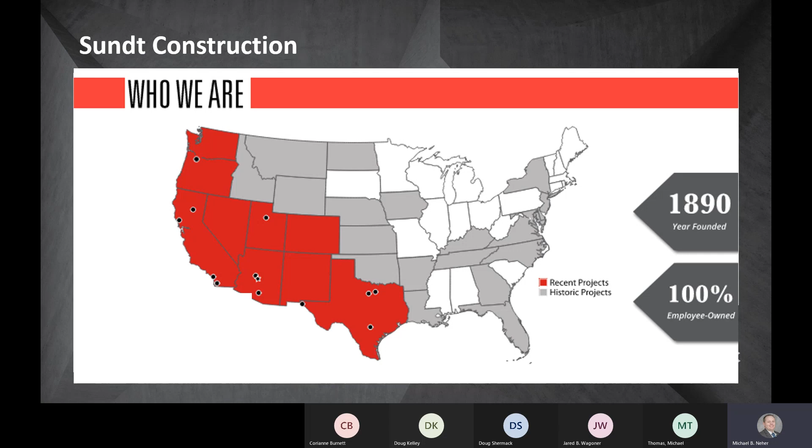So the agenda for today: every meeting we start off with a safety share, it's the most important thing we do every day, so we want to make sure we tackle that first before we move on to anything else. We'll do a quick project overview and discuss the project schedule. We'll go through bid schedule and bid opportunities as it relates to Division 32. We'll go over a brief description of instructions to bidders and exhibits, kind of what you would expect on bid day, as well as the bid form. Then we'll go through some deferred or delegated design responsibility that'll be the responsibility of the Division 32 contractor. Then we'll go into an in-depth review of Division 32 scope of work, and then open it up for questions and answers at the end.

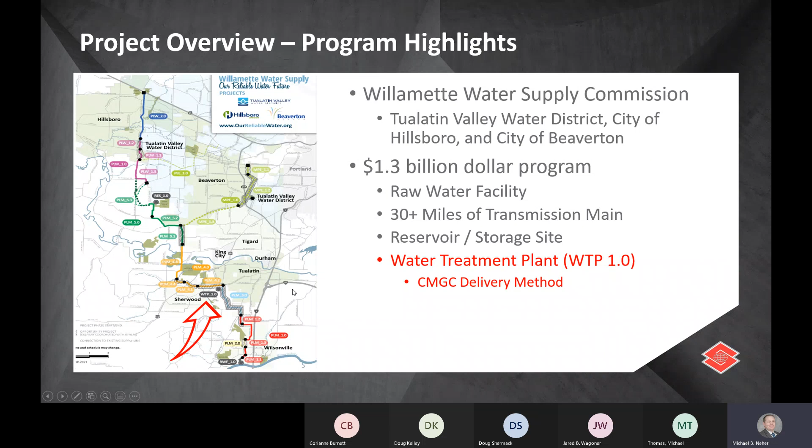So this right here is where the water treatment plant is. Zooming a little closer, the red box on the picture is the exact location of where the water treatment plant is going to be. It's located about half a mile south of the Tualatin Sherwood Road and 124th Street intersection. This site was specifically chosen because it is an outcrop of basalt bedrock, and the plant is designed to sit directly on this bedrock for seismic reasons.

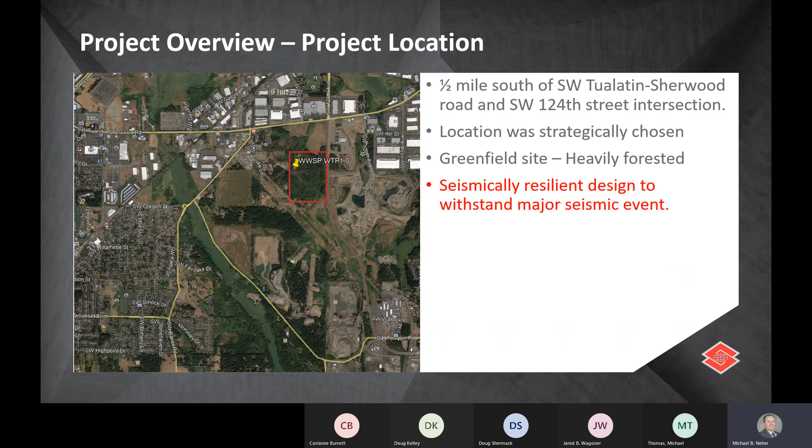That's really the major design decision of this plant and entire system, to be a resilient system and plant during a major seismic event. This site is currently a greenfield site, heavily forested, so one of the first things we'll have to do is deforest everything. We'll have a lot of drill and blast that has to happen to level out this bedrock outcropping and to be able to build the structures.

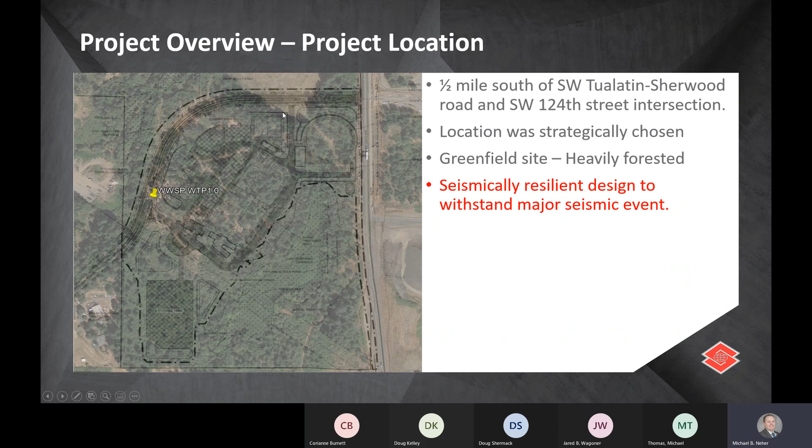Zooming in a little closer, you can kind of see the project overlaid with the existing foundation, or the existing forest here. As I mentioned earlier, it's right off of 124th Street, where the main entrance is going to be, onto a new road called Orr Drive, or Orr Road, sorry.

So the project itself is about 23 acres. There are multiple treatment areas on the site, including a 10,000 square foot administration building. It also has about 40,000 cubic yards of concrete, which includes both structural and site paving, curb and gutter, sidewalks, and stuff. The structural concrete is roughly 32 or 33,000 yards, so the remaining 7 or 8,000 yards is sidewalks, curb and gutter, and other site improvements.

Approximate earthwork quantities are 65,000 yards of cut and fill, 180,000 yards of structural excavation, and 120,000 yards of pipe excavation. There's also $20 to $24 million in process equipment that will be directly purchased by Sundt on this project, and the install will be done by the process equipment package.

There's a 10 million gallon pre-stressed concrete reservoir, which is this large circular structure shown on the picture, as well as there's multiple pre-engineered metal buildings throughout the campus. And there's multiple building trade opportunities that can be bid on.

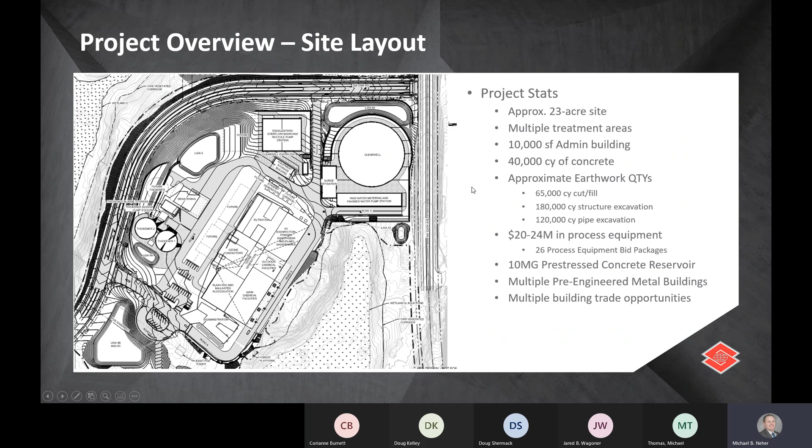Going to the project schedule, we're expecting to kick off in the first quarter of 2022. And like most wastewater type jobs, it does have a long burn. Right now we're expecting the site grading, paving, hardscape, miscellaneous site appurtenances, irrigation and landscaping will be occurring roughly first quarter to second quarter of 2024, and we need to be done with that by the end of 2024, beginning of 2025.

Bid schedule and bid opportunities. We have two GMPs on this job. A GMP is basically a bidding phase. The first bidding phase, GMP 1, officially starts next Friday when it advertises, with bids due on November 4th. GMP 2, which is the later work we're talking about today, we're planning to advertise around April 2023, with bids due middle of 2023.

The reason why we've decided to postpone the bidding of this scope of work is that we want to minimize the amount of impact that inflation is going to have. It's also unfair for us to ask subcontractors to hold their price or lock you into a price two years in advance of performing your work. So we're going to bid this scope out in 2023, so that we're able to get more competitive pricing in the environment of when the work will be happening.

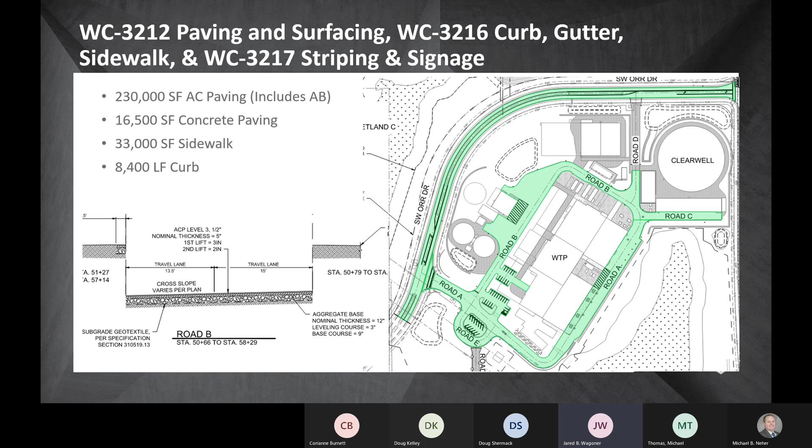This is a paving section of Orr Road. The project does include some paving along Orr Road, the public road that's going to travel around the north to the west side of the project. There's a 76-foot right-of-way on that Orr Road with multi-use paths on each side, 12-foot multi-use paths, landscaping band, then your gutter, 12-foot travel lanes. That travel lane has 9 inches of AB and then 6 inches of asphalt, and some vertical curb and a median with more landscaping on the inside, and geotextile underneath it, which would also be the responsibility of the Division 32 subcontractor for doing the surfacing and paving.

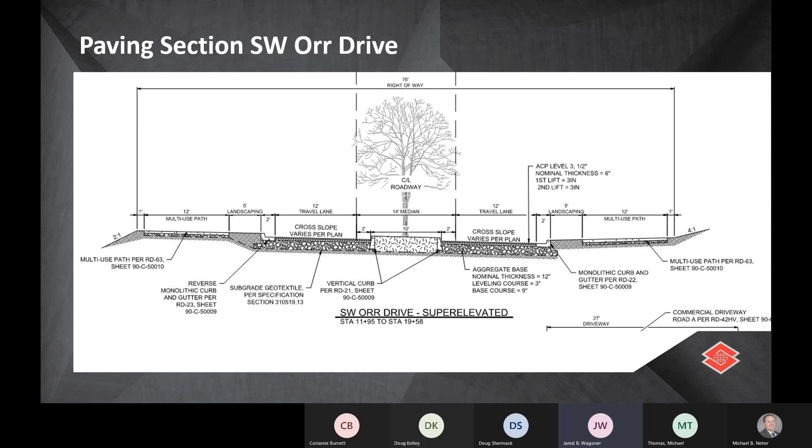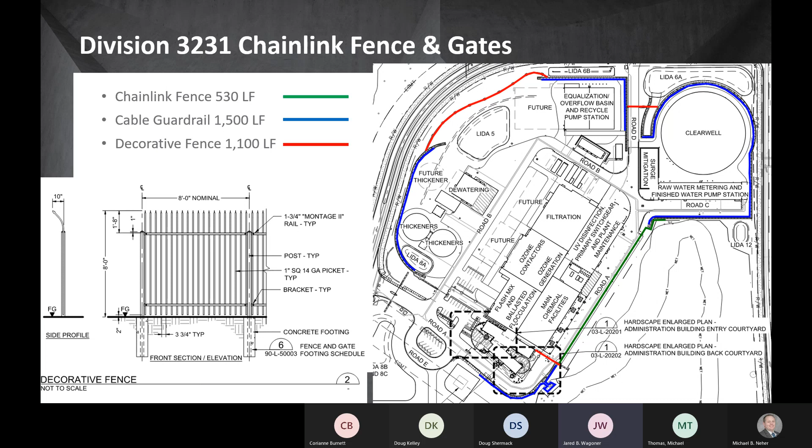Division or work category 3290 for landscaping is a fairly large scope with a number of elements. Like we mentioned earlier, irrigation is partial delegated design. A delineated portion of the landscaping area is going to be delegated, while the remainder of the irrigation on the site is fully engineered, so only a portion of that irrigation would be the responsibility of the subcontractor to finish out.

Landscaping would also include all of the vegetation, the planting, trees, shrubs, and grass. I'll show you more on that on the next slide. There's a forest platform, which is a fully delegated design, more on that later. Also benches, bicycle racks, trash receptacles, and other outdoor furnishings.

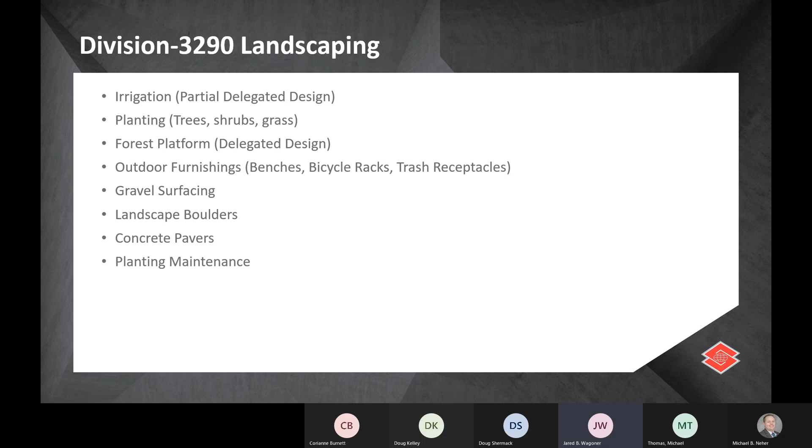There's some gravel surfacing and landscape boulders, a number of which go around the administration building in particular. Those are granite boulders largely sourced from our blasting on site. Our blasting subcontractor will be responsible for grabbing a couple of those granite and basalt boulders and setting them aside for later use as landscape boulders, as well as some of the masonry walls around the site. There's also a bit of concrete pavers around the administration building, and once that vegetation is in and planted, there's a maintenance period that's also the responsibility of the landscape subcontractor.

This is an overall image of the planting plan for the site. It covers the main plant area, plus the section along Orr Drive, and some improvements going all the way down 124th Avenue that we're responsible for, including a number of trees to be planted along 124th. On the bottom left-hand side is our storage yard, where we'll set up our trailers and employee parking, and around the perimeter of that is some restoration planting as well as additional shrubs and plants.

For the takeoff of vegetation on site, we've got about 300 trees, 500 large shrubs, 21,000 small shrubs, and about 180,000 square feet of grass to be installed around the site.

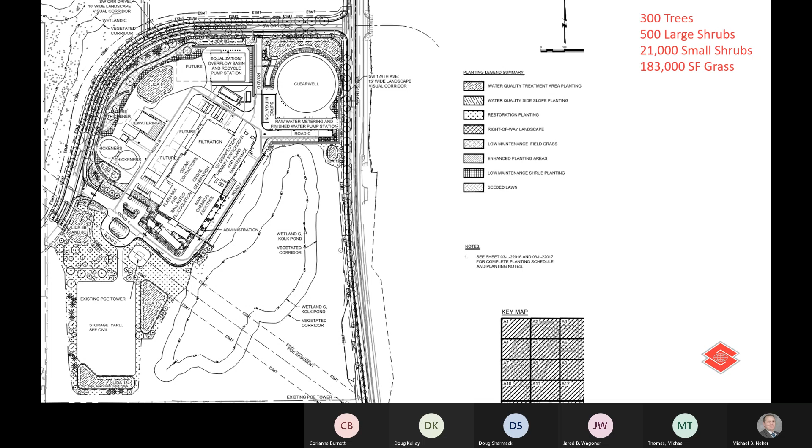These are some images of the forest platform we're looking at for the site. This forest platform overlooks the Kolk pond on the southeast corner of the plant, right outside the administration building. It's an FRP deck supported by a steel structure, and it will overlook that area.

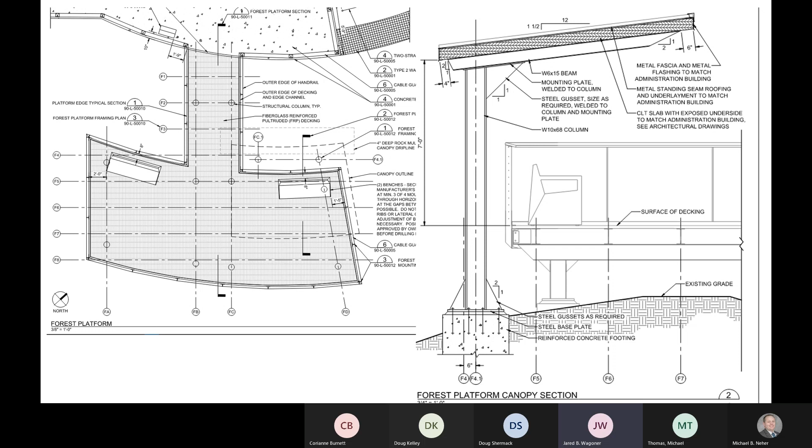This is a delegated design. It's got a canopy that will shade some of that area so people can go out there and take a look at the forest and the geologic Kolk pond in that area. As I mentioned, this is a delegated design, so the subcontractor will be responsible for all of the structural design on this forest platform, including the stamp by a registered professional engineer in the state of Oregon.

All right, perfect. Thank you, Jared. That concludes our review of the site work.